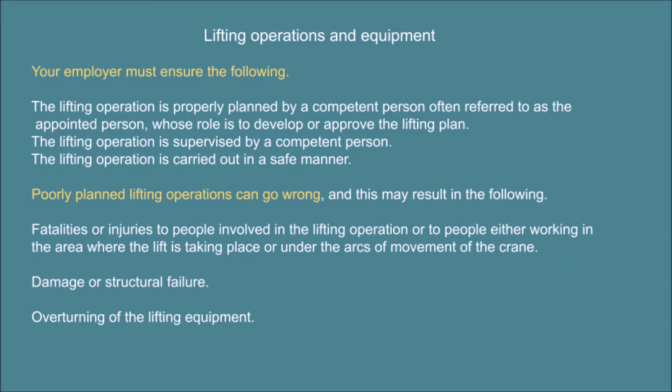Accidents involving cranes and other lifting equipment are often caused by one or more of the following: using the wrong type of lifting equipment or equipment with the wrong rated capacity, using lifting equipment incorrectly with unsafe technique, or failing to follow the agreed lift plan and system of work for the task in hand.

Other causes include poor assessment of ground conditions, overhead obstructions, or changing weather conditions such as high winds; lack of coordination of crane movements when more than one crane is operating and their arcs of movement overlap; lack of training of the crane operators and signalers; lifting a load of unknown and underestimated weight or unknown center of gravity; and poor inspection and maintenance of the equipment and accessories.

What your site and employer should do for you: use only competent and authorized people to plan, supervise, and carry out lifting operations. Provide lift plans and safe systems of work, and identify exclusion zones for all lifting operations, and make sure that you are briefed and understand them.

Make sure that lifting equipment and accessories are suitable for the task, inspected, maintained and examined. Make sure they are marked with safe working loads. Provide you with information and training so you can carry out the lifting operation.

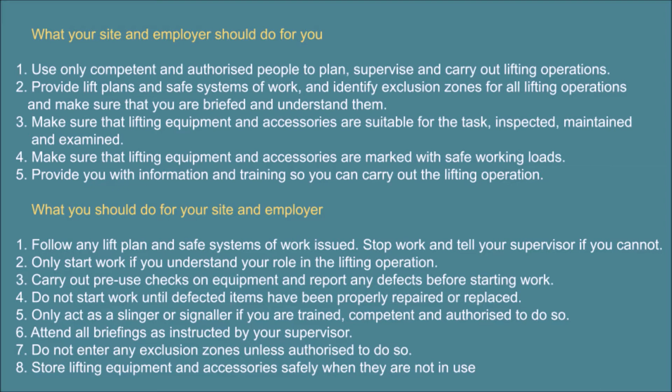Examples of lifting equipment and accessories. Lifting equipment is any work equipment, such as cranes (mobile and static), hoists, telehandlers and excavators, that is used for mechanically lifting or lowering any load, including people. This also includes scaffold hoists and gin wheels.

Passenger and goods hoists, telehandlers, excavators being used as a crane, rough terrain forklifts, crawler, mobile and tower cranes, and mobile elevating work platforms.

MEWPS, lorry loaders, and inertia brake gin wheels, where the wheel brakes automatically if the rope is released, are now common practice and far safer than traditional gin wheels.

There should be a lift plan for any operation being carried out by any form of lifting equipment. The detail of the plan will reflect the complexity of the operation. Work involving people at height, or loads which are difficult to sling, is more complicated and would require a more detailed lifting plan.

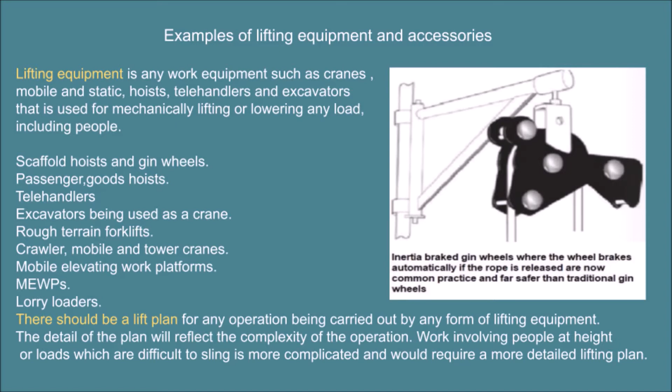Lifting accessories are items of equipment used for attaching the load to the lifting equipment, such as chains, shackles, ropes, spreader beams, slings, eye bolts, and hooks.

Planning a lifting operation: all lifting operations must be properly planned by a competent person, sometimes called the appointed person, who will decide on how best to complete a lifting operation safely. This information will be recorded in a lift plan as part of the safe system of work.

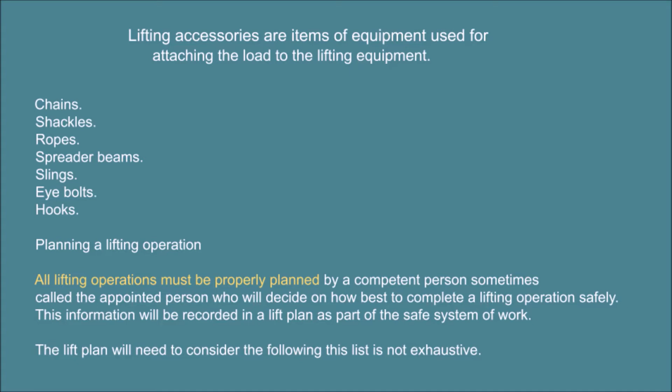The lift plan will need to consider the following, and this list is not exhaustive: weight of load to be lifted, the ground conditions and surrounding environment such as waterways, railways and highways, overhead hazards such as a power line, and the height of the lift required.

Other considerations include the type of lifting equipment to be used, selection of lifting accessories such as chains and shackles, the lifting team including crane operators and slingers or signalers, the level of supervision required, and the means of communication such as hand signals or two-way radios.

The lift plan will give information about any exclusion zones that are required to ensure the safety of people on site and off-site. You must not enter these zones unless authorized to do so by the lift supervisor. If you are involved in any lifting operation, you must be briefed on the contents of the lift plan before work starts.

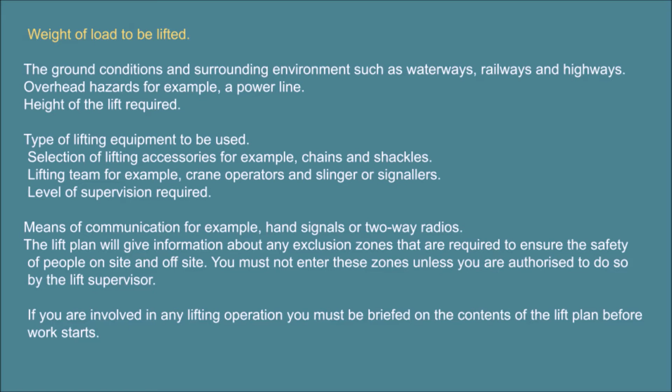Inspections. A competent person must inspect all lifting equipment and accessories at suitable intervals: before first and every use, weekly, and monthly. The frequency and type of inspection will depend on the potential for the item to fail. The inspections should include visual and functional checks.

Thorough examination. A periodic thorough examination, over and above the inspections listed above, must be carried out by a competent person. This will normally be a qualified engineer and is a detailed inspection that produces a report on completion. The report should be kept on file at the same location as the equipment or accessory. Lifting equipment must be thoroughly examined as outlined below.

When it is first used, unless bought brand new. If it is installed, after installation but before first use. If it is assembled, after assembly but before first use. At intervals not exceeding 12 months. Lifting equipment used for lifting people, and all lifting accessories, must be thoroughly examined every 6 months. A MEWP should be thoroughly examined at least every 6 months.

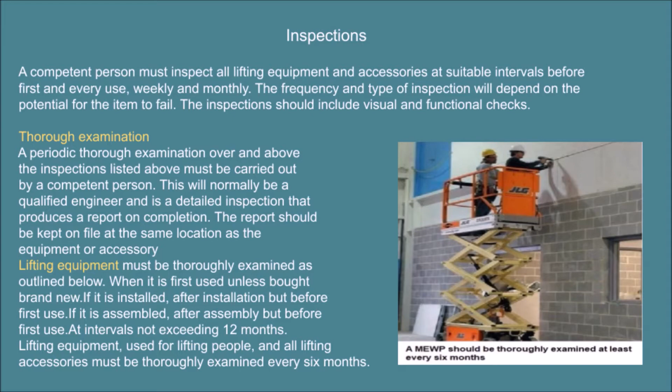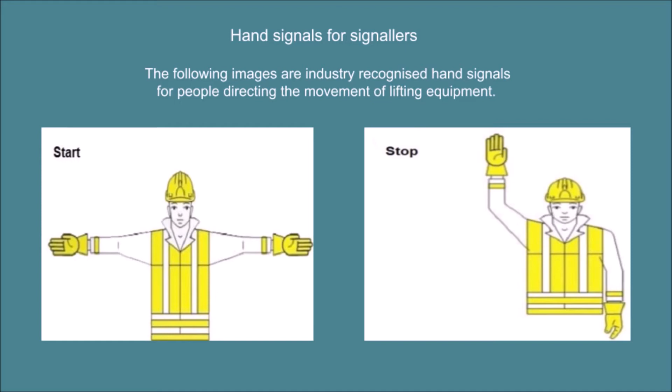Hand signals for signalers. The following images are industry-recognized hand signals for people directing the movement of lifting equipment: Start, Stop, Raise, Lower, Left, Right. You must not signal plant operators unless you are trained and authorized to do so.

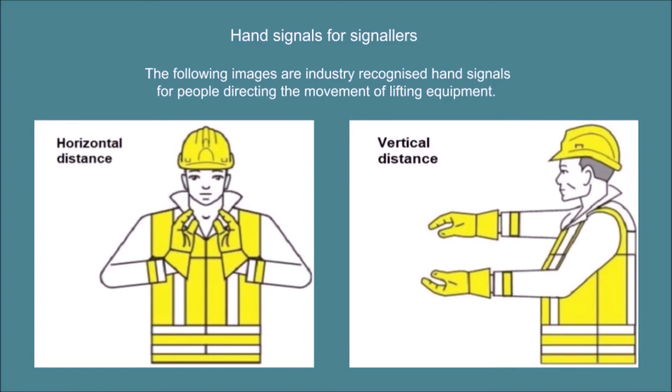Horizontal distance, Vertical distance, Move backwards, Move forwards, Danger, End. The signaler should stand in a safe position where they can see the load and can be seen clearly by the lifting equipment operator.

They should face the operator if possible. Each signal should be distinct and clear. These signals have been reproduced from Schedule 1 of the Health and Safety, Signs and Signals, Regulations.

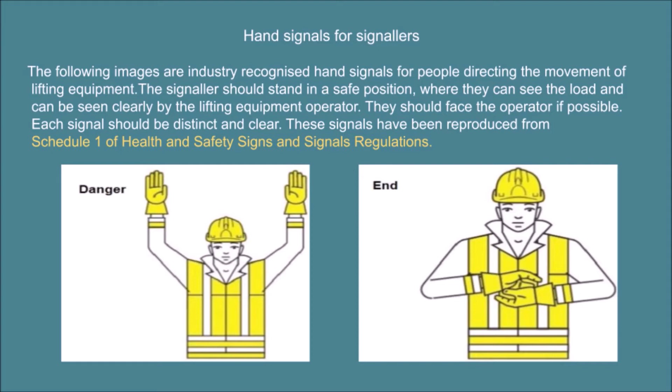Working at height. About half of all fatalities on construction sites occur as a result of a fall from height. An average of 7 people die each year as a result of falling through fragile roofs. Over half of all reported specified injuries are due to either falls from height or a slip, trip, or fall on the same level. Selecting the wrong type of work equipment results in many falls from height every year.

Many construction workers have suffered a life-changing injury as a result of a fall from height. Such an event impacts not only the worker but their family, lifestyle, and ability to earn an income. It is important that all work at height activities are adequately planned, risk assessed, and the correct equipment selected and used to reduce the risk of injury.

What can you fall from? Many falls are from poorly secured ladders, faulty or poorly used step ladders, or makeshift working platforms, which offer little or no fall protection. About 7 workers a year die after falling through fragile roofs. Others suffer serious injuries and disabilities as a result of falling. For all work at height, measures must be taken to prevent the risk of any fall that could cause injury.

Work at height is work at any height, above or below ground level, where a person could fall and be injured. It also includes instances such as working next to, or in, an open excavation, because of the risk of falling in, or of something falling in on you if you are working in the excavation.

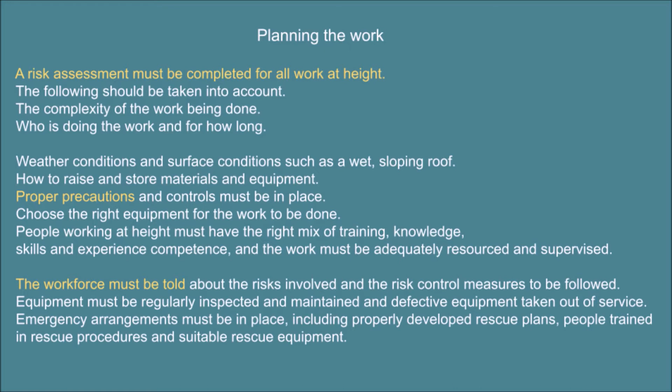Hierarchy for working at height. Step 1: Avoid working at height. Assemble on the ground and lift into position using a crane, or by fixing guardrails to structural steel work on the ground before lifting and fixing at height.

Step 2: Prevent falls from occurring. Use an existing safe place of work, parapet walls, defined access points, a flat roof with existing edge protection. Step 3: Prevent falls through providing collective protection - scaffolding, edge protection, handrails, podium steps, mobile towers, MEWPs.

Step 4: Prevent falls through providing personal protection. Use a work restraint travel restriction system that prevents a worker getting into a fall position. Step 5: Minimize the distance or consequences of a fall using collective protection - safety netting, airbags, or soft landing systems.

Step 6: Minimize the distance or consequences of a fall using personal protection - the last resort: industrial rope access working on a building facade, or a fall arrest system, harness and fall arrest lanyard, using a suitable high-level anchor point.

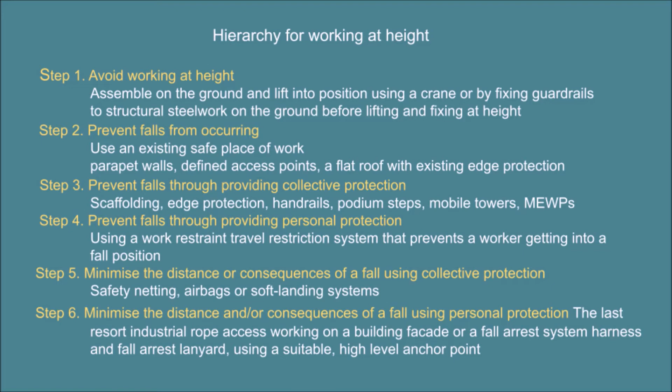Preventing falls. If work at height cannot be avoided, the best way to prevent people falling is by using physical barriers and equipment. Use scaffolding, mobile access towers, MEWPs, podium steps, or other proprietary edge protection systems.

The minimum height of the top guardrail is 950 mm above the working platform. Gaps between guardrails and toeboards on the working platform must not be greater than 470 mm. Plastic barriers, netting, or rope and pins are not suitable as edge protection, as they are not rigid enough to prevent people from falling, unless they have been specifically designed for that purpose.

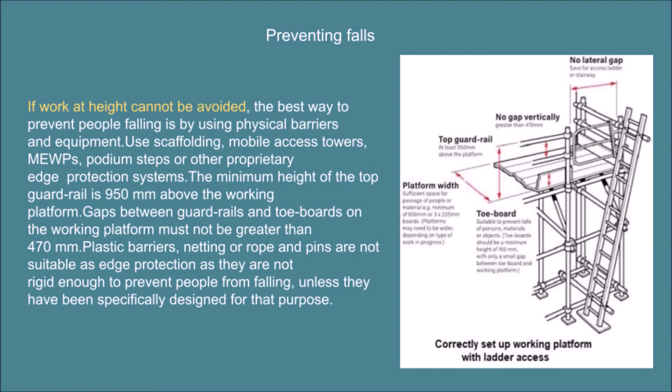Requirements for working at height. Safe access, such as a tower staircase or secured ladder, must be provided. Edge protection such as temporary guardrails must be put in place. Remember that surfaces can become slippery in wet or frosty conditions.

If you are working on or near a leading edge, then measures such as a physical barrier or safety net should be installed. A harness and fall arrest lanyard must only be used as a last resort. Never work on any structure where there is no protection from falls.

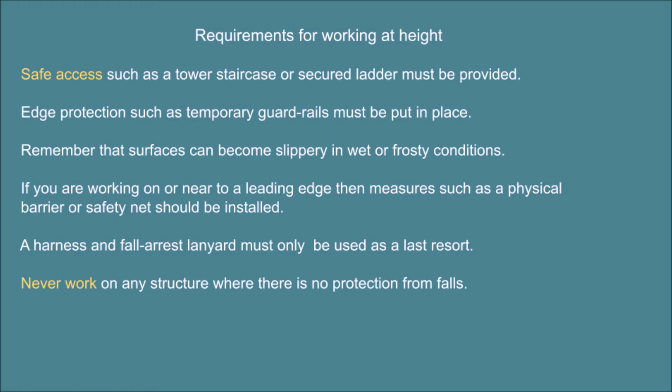Voids and holes. All voids and holes, such as those listed below, where a person could fall any distance and injure themselves, must be protected. Floor and roof openings, gaps between floor joists and roof trusses, lift shaft openings, service holes and risers, open inspection chambers and other voids.

Openings created during demolition, open excavations, openings created during site surveys. All openings must be protected with secure barriers, covers, gates, or doors, which are secured in position and display the relevant warning signs.

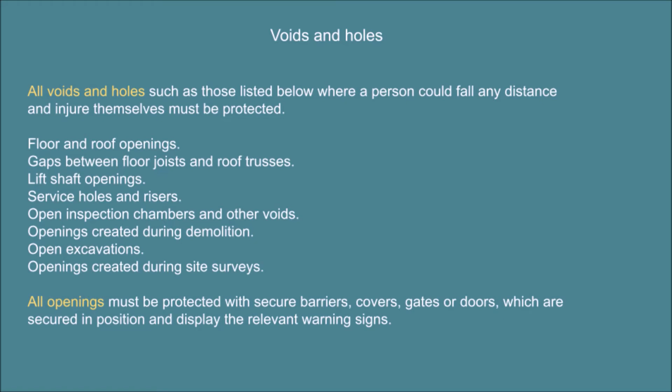Never remove a protective cover unless authorized to do so, and unless you are protected against falling whilst the cover is not in place. If a hole, gap, or void needs covering, you should report this to your supervisor straight away.

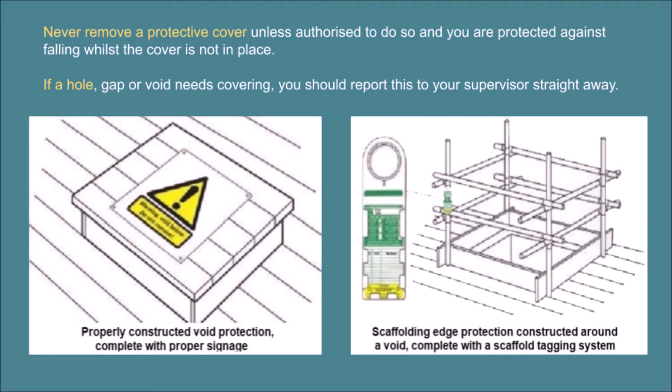Fragile roofs. There are many fatal and serious injuries from people falling through fragile roofs and roof lights. The following surfaces are likely to be fragile.

Roof lights, old liner panels on built-up sheeted roofs, asbestos and fiber cement sheets, metal sheets, glass including wired glass, chipboard and plywood boards.

Slates and tiles, asbestos and fiber cement sheets are obvious, but fragile roof lights, which look like the more secure surrounding roof structure over time, are not so obvious.

Many people are not aware that parts of a roof are fragile. You should not assume that a roof will support your weight or try to walk near the underlying supports. All fragile roofs should be considered unsafe unless additional protection has been provided.

It is sometimes difficult to see a fragile surface, especially if a roof is dirty, weathered, covered by moss, or has been painted. Buildings with a fragile material roof covering should show warning signage, as shown in the image below, but this will not always be the case.

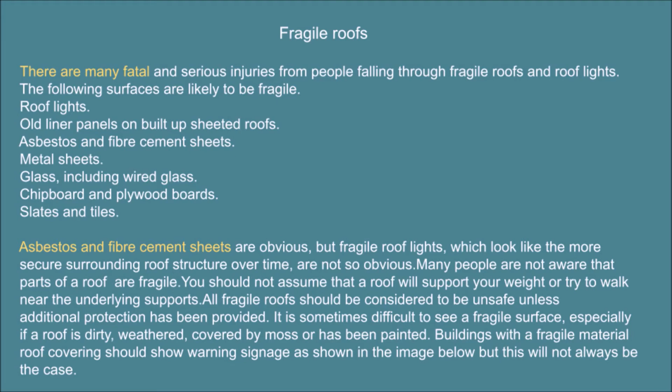A safe system of work must be put in place and, as a priority, work on a roof, particularly a fragile roof, should be avoided where possible. An example of a safe system of work would be to work from underneath the roof using a mobile elevating work platform, MEWP. Fragile roof and crawling board signs. Using a MEWP to work underneath the roof.

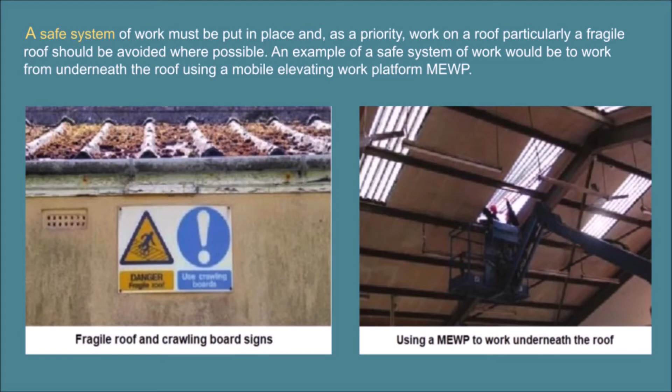A safe system of work should also consider the following: suitable access is provided, such as a stair tower or ladder, or a MEWP is used. If the work has to be carried out from above the fragile surface, specialist working platforms with handrails should be provided. These are designed to span the roof purlins and evenly distribute the loading applied.

Physical barriers or covers around or on fragile surfaces, such as roof lights or skylights. The installation of safety netting, crash decks, or airbags underneath the roof. Anchor points, work restraint systems, fall arrest lanyards, and safety harnesses.

Arrangements for emergency situations, including how a rescue will be carried out for casualties who have fallen into a safety net or are suspended by a harness. Never try to access or cross a fragile roof without a safe system of work.

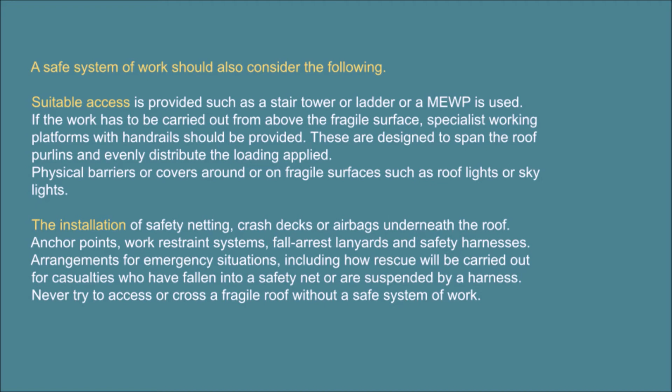Types of access equipment: ladders. Working from ladders should be considered a last resort. They should only be considered for light work of short duration, less than 30 minutes recommended, that does not involve carrying equipment or materials up or down, pulling or pushing motions, or the use of pressure, and where the use of other work equipment is not suitable.

Ladders are most often misused when used as a working platform. A risk assessment must have validated the use of a ladder to prove that it is not reasonably practicable to use other means or methods. It is essential that those who use ladders are trained and competent to do so.

Always check ladders are in good condition before use. Report any defects to your supervisor. Ladders should never be used near overhead power lines. Ladders should never be painted, as this can hide defects or damaged parts.

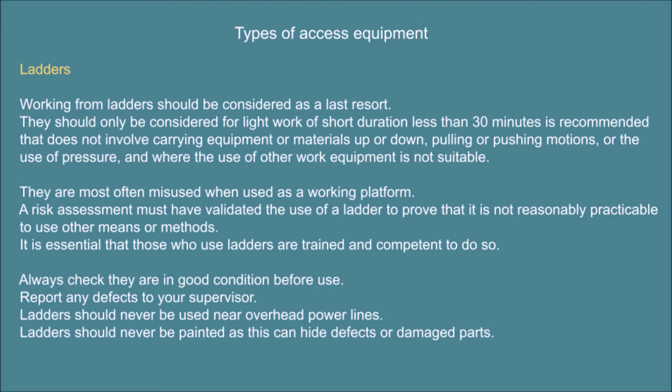If ladders are used, they must meet the following criteria: be of the right type, Class 1 Industrial or EN131 Trade and Industrial, Heavy Duty and Industrial use, for professional users. Be in good condition. Be placed on firm and level ground. Not be at risk of being struck by vehicles.

Use outriggers if available. Be set at the right length and angle for the job, 75 degrees or a ratio of 1:4, 1 out to 4 up. Be properly secured, tied at the top. If being used as a means of access, extend 1 meter past the stepping off point. You should have 3 points of contact with the ladder at all times. Ladder at 75 degrees, 1 out to 4 up.

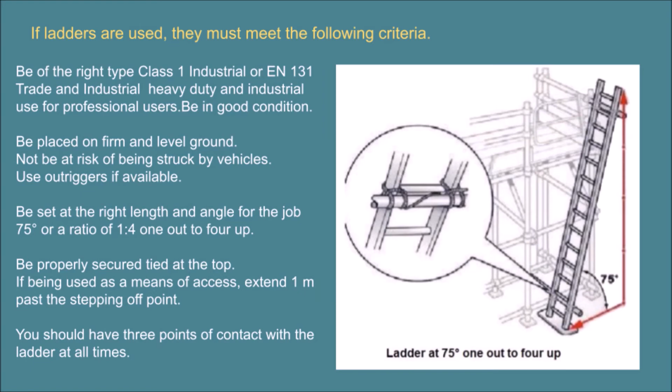Ladders are classified into two European-wide categories: Class 1 Industrial or EN131 Trade and Industrial, Heavy Duty and Industrial Use for professional users, and EN131 Domestic for non-professional users. Domestic ladders are for domestic use only and should never be used in a construction environment. Class 1 Industrial or EN131 Trade and Industrial ladders are recommended for use in construction environments as they offer the highest duty rating.

Step ladders. There are many types of step ladder on the market. Some offer good fall protection and others less so. Step ladders should only be considered suitable in the following circumstances.

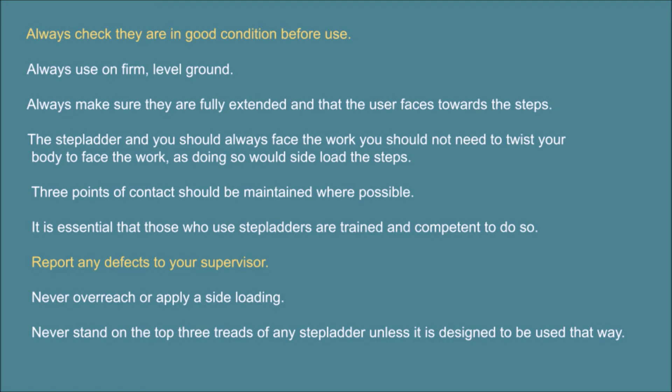Podium steps have become a popular piece of access equipment and are a safe and efficient means of achieving low-level access if used correctly. They are a safe and adaptable form of access equipment, with a safe working platform if used correctly. They allow you to work from the working platform facing every side without it becoming unstable.

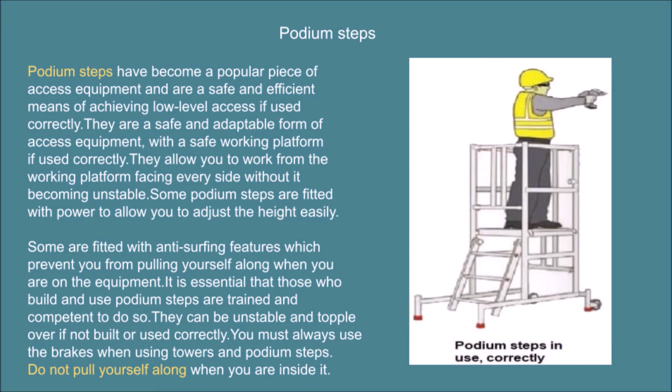You must always use the brakes when using towers and podium steps. Do not pull yourself along when you are inside it. Podium steps in use, correctly.

Mobile access towers are a safe and adaptable form of access equipment if used correctly. Unfortunately, many access towers are not erected or used correctly, and as a result become unstable and are the cause of many accidents. You should hold a Prefabricated Access Suppliers and Manufacturers Association, PASMA, or equivalent qualification to erect, alter, or dismantle a mobile access tower.

The training should cover how to reduce common risks associated with this type of equipment and include information on the following: safe working on a mobile tower, with toe boards and guard rails in position.

Manufacturer's instructions for safe use. Positioning of the equipment, it must be positioned on suitable, firm, level ground. Safe working on a mobile tower, with toe boards and guard rails in position.

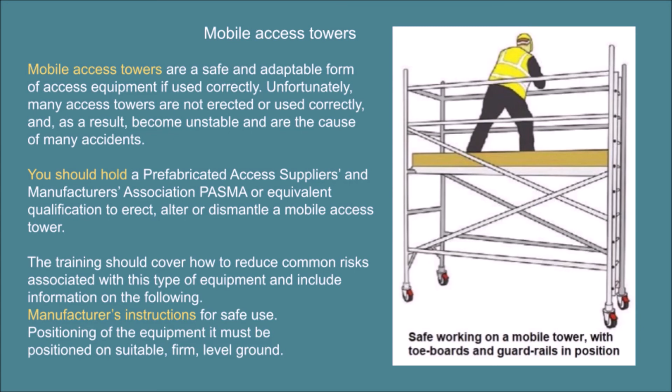Checks made for weak areas, such as inspection chambers and lids, stop tap covers and so on. Making sure it is not being used close to an overhead power line where a person could make direct or indirect contact with the power line.

Using locking wheel brakes. Fitting of advanced guard rails from a lower level to provide edge protection at the level above, without putting the operative at risk during installation. Checking that guard rails and toe boards are fitted, these must not be removed.

Assessing loading capability, how much weight can be placed on any platform. Considering whether bad weather, such as strong winds, rain, or snow, will cause problems. Assessing the chance of the tower being struck by mobile plant or other vehicles. Using barriers and signs to create a safety zone around the tower, to prevent other workers or the public from entering the work area.

You must make sure of the following: towers are not overloaded, only the internal ladder is used to access the decks, working platforms are not fitted too high so that guard rails are too low, overreaching is prevented and prohibited, and wheels are locked when the tower is being used.

If you are only working on a mobile access tower and not involved in building, altering, dismantling or moving it, you should receive a toolbox talk on the risks and hazards associated with your work as a minimum. A toolbox talk will not give you the knowledge, skills, experience, or authority to build, adapt, dismantle or move the tower.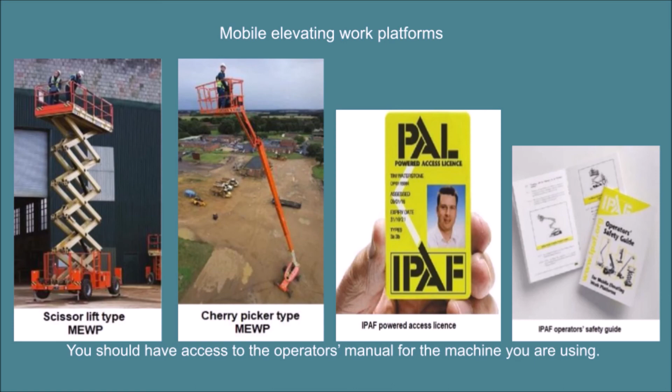Scaffolding must only be built, altered, or dismantled by trained and competent scaffolders. All working platforms must have double guard rails and toe boards fitted. Keep the scaffold working platform clean and tidy. These areas should not be used for storage unless specifically designed and designated for this purpose.

You should always follow the safe loading information. Brick guards must be fitted if materials are stored above toe board height or if there is a risk of tools or materials falling and striking someone below. You must never interfere with scaffolds or remove any components, no matter how simple, and you must never overload scaffolds.

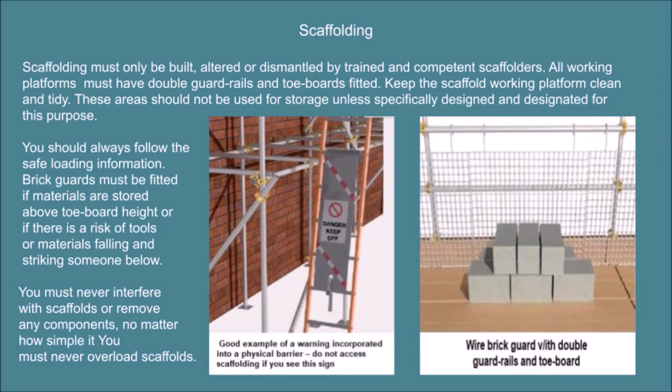Employee prosecuted for dangerous work at height. A steel erection firm's employee has been sentenced at Manchester Magistrates Court after he admitted working unsafely at height on a hotel development in central Manchester.

The Magistrates Court heard that a member of the public had contacted the Health and Safety Executive, HSE, claiming that a man had been seen balancing on scaffold tubes in the rain while working on the roof of the multi-story hotel. HSE inspectors later found the employee working on the roof.

An investigation by the HSE found that the employee had climbed up the scaffold to hammer the steel beams into place and had not used the tower scaffold that had been made available for him. There was also a full-time scaffolder on site, available for any of the contractors to use, to make sure safe working platforms were in place.

The employee in question pleaded guilty to breaching Section 7 of the Health and Safety at Work etc. Act 1974 and was sentenced to 6 months imprisonment, suspended for 18 months. He was fined £1,400 and ordered to pay costs of £2,939.18.

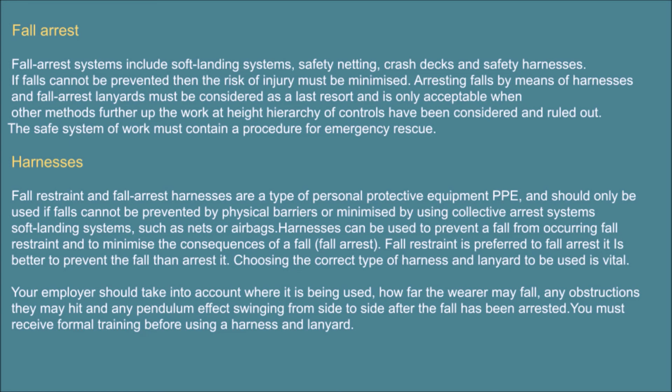It is vital you know how to inspect a harness for damage, how to fit it properly, where to attach it and where not to attach it. Never use a harness to work at height unless you have been trained. A harness and lanyard could be all that prevents you from falling to your death. Make sure you clip onto a suitable anchorage point at all times.

There must be an effective rescue plan in place in case a person wearing a harness falls; they will need to be rescued quickly. When someone's fall is arrested and they are suspended in a harness, they can experience a condition known as suspension syncope, where the person suspended faints and could suffer further complications. If a person has been suspended in a harness for any length of time, an ambulance must be called for a professional medical assessment.